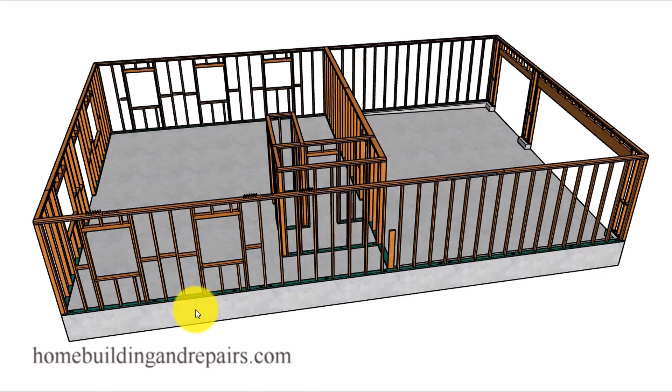Here is another video that will make a big difference, especially if you're going to be doing any of your own plumbing or electrical when it comes to dealing with top plate connections and framing, and plumbing pipes and electrical wires that are going to be running through these areas.

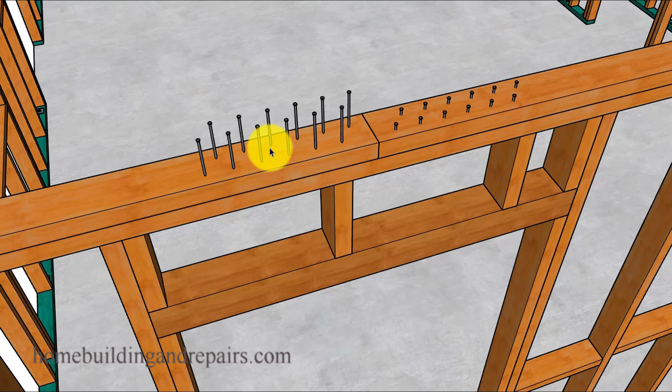Now, the first thing I want to point out is that most framing breaks, the building plans usually require 12 nails on each side of the framing break. And that's a lot of nails.

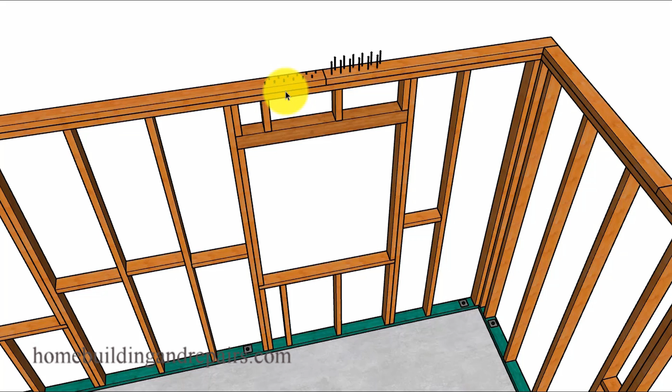If we step back here, you can kind of see that when it's over a window header or another place where there might not be a lot of electrical or plumbing running through those areas, these could be the perfect spots. Since you're going to need these nails at every single break, it's not a bad idea to try and design the house so that these breaks are strategically located.

And of course, it's not a bad idea to use the longest framing plates possible so you don't end up with a situation like this all the time. Now, I'm not saying this is a bad situation, especially if the electrical or plumbing is going to be running in this area and you're not going to have anything in these other areas.

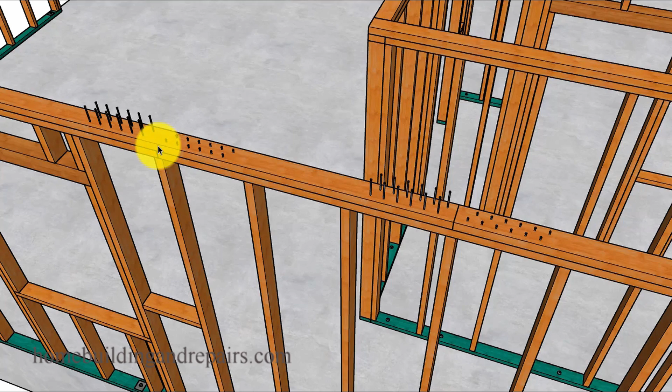So again, you can see where planning out the framing breaks and using the correct lengths of lumber could make a big difference in your project, especially if you need to use straps that are 48 inches long and require like 50 or 60 nails in them.

I don't know exactly how many nails they require, but now instead of having all of these nails running through the top plates vertically, you're going to have them running through horizontally. Either way, something like this, or the 12 nails on each side of the framing break, can create a problem for the plumber or electrician who needs to drill a hole through them.

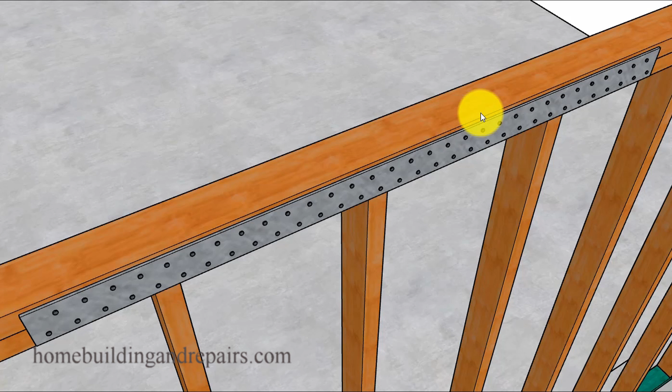Now let's take a look at the break and let me explain why you might need a strap there. So if you remember, we had a break here, and if you have a break in between the framing plates that is shorter than 48 inches, then you might need to put a long strap on it.

Now that will be determined by your engineer or your local building authorities. So if you're just building something on your own, yeah, you can put your breaks wherever you want to—that might not be a big deal. But if you're building a new house or remodeling, or putting a room addition on, this is something you're really going to have to think about if you have any plumbing or electrical coming through the framing plates in these areas.

Now, something else I need to point out: since the strap is here, some of you might be wondering, would you need a strap over here too? No, because once we put the strap on here, we've made a solid connection, so the break is no longer there in a way.

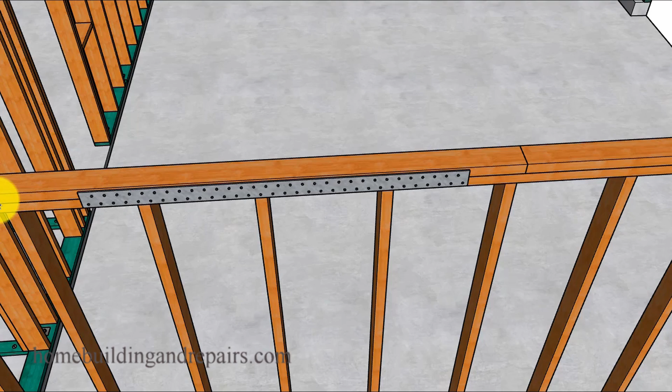And then this break right here is going to be more than 4 foot away, because it's going all the way back to the other break in either direction.

Now, if you do run into a situation where you need to put a pipe through an area like this, it's really not going to be that big of a deal. You just leave the nails out—do not put them in. If you put them in, the plumber's just going to pull them out anyway, so why put them in the first place?

And again, if you don't know where the pipes are going, then fill the nail holes, and the plumber can pull them out. Hopefully they can pull them out and the nail heads don't pop off.

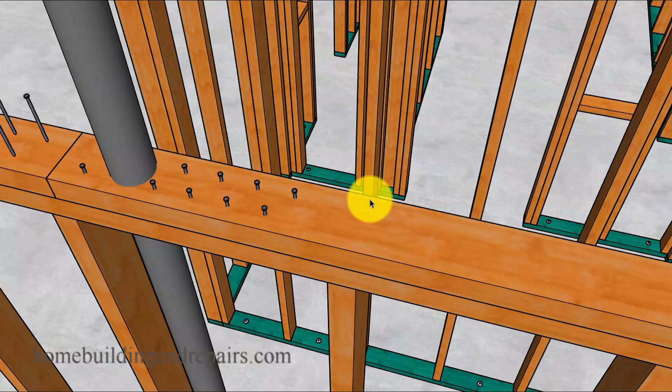For those of you wondering what's the big deal: the plumber or electrician usually comes in and drills a hole into the wall framing plates, hits a nail with their drill, and that ends up either jerking their arm around or dulling the drill bit. Within a short period of time, they're going to have to either get another drill bit or sharpen the one they have.

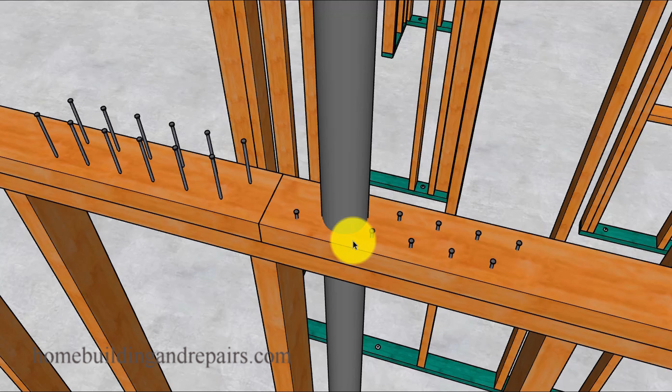If you can avoid having any obstacles in their way, they are going to become your new best friend, especially if you're going to be working with these people over and over again on different projects.

Let me remove the pipe so you can see there are a couple nails in the way. Not a biggie. If you look down while framing the walls, you can see there's a pipe coming out of the concrete. There's a good chance this pipe is going to be running through the plates. Simply leave some of the nails out, or you can relocate the nails a little farther back.

Now, when I was doing this, I remember it said there had to be 12 nails on each side of the framing plate. I could space them farther back. There wasn't an exact amount specified. It didn't say it had to be 2 inches from the break and then spaced evenly 1.5 inches away. I never ran into something like that. If you have, feel free to let us know, but this isn't a big problem.

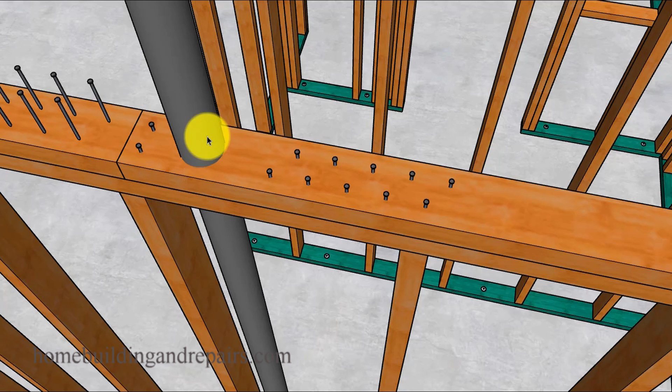If you have a situation like this where there's a pipe coming through, you simply move your nails around to make it work. And of course, if there was a strap, again you would just leave the nails out.

Let's go ahead and take a look at what I'm talking about as far as the framing plates. Here we have a continuous plate, a couple of breaks here, and because this is a continuous plate, I can cut a 2-foot piece here and a smaller piece here, because this is going to be my continuous tie for this situation.

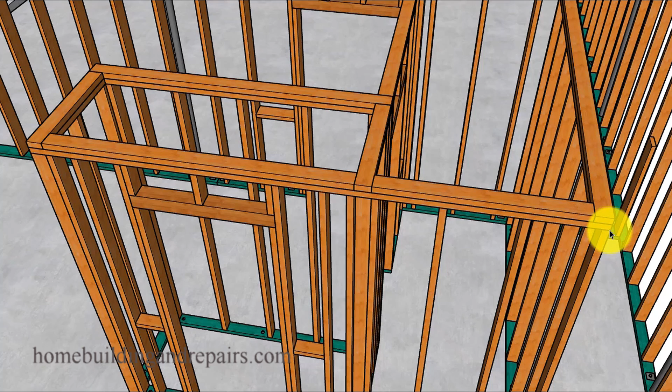Of course, you wouldn't want that, but I can't tell you how many times I came to jobs, a long time ago, where you'd have 2 feet from the edge, a break here, and then another break here, and they might have a piece going all the way across. The framer might even use scraps to fill in the top plates. Today, that's just not going to cut it, so you're going to have to give it a little more thought.

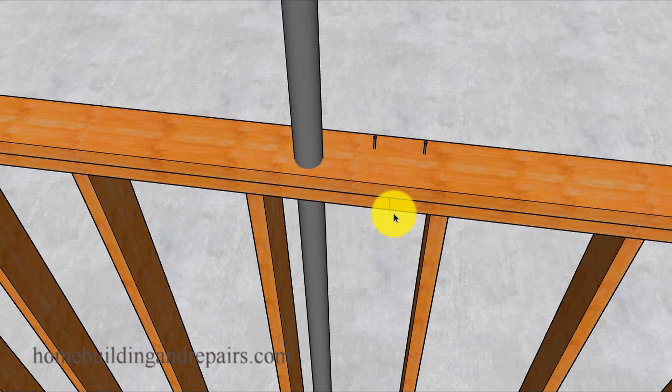Here's another situation where you have a pipe coming up. Here's the break, not going to be a big deal. You just put a couple of nails on each side.

Then, after you've got the whole house framed and all the plumbing and electrical is in—and I've done this plenty of times too—it doesn't specify that the nails have to go down from the top. They can actually go up from the bottom. Something like this just might work out great for you. Just put your 12 nails on each side of the break. The electrician and the plumber won't have very many nails to run into, and that could be a win-win deal.

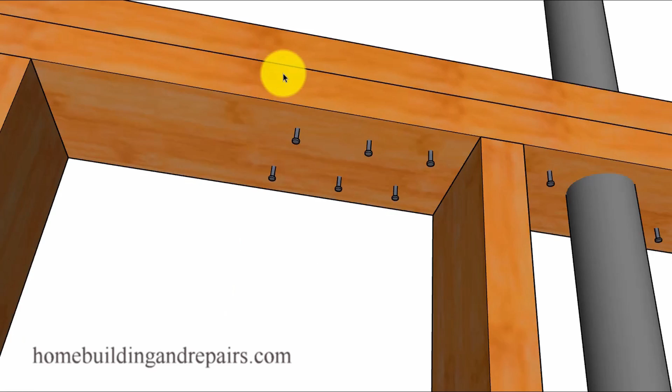Now here's another tip, and this one's easy to do: simply put the nail just a little bit over on each side of every wall framing stud. If you stagger your nails, you can see how I have one on this side of the framing plate and one over here on the other side, but they're right off to the side. The reason for that is to avoid hitting the nails you already drove into the framing studs below.

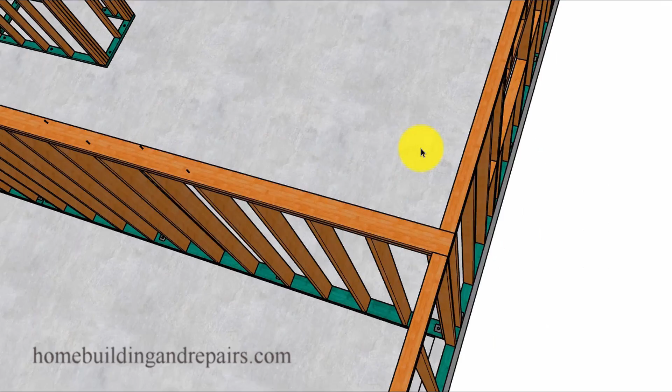So hopefully this makes sense. Here are the nails staggered—the plumber has an open spot, the electrician here too. If you put the nails in the middle, the plumber and electrician are not going to be your best friend, but something like this, yes they will. Especially if you're doing the work yourself. I can't tell you how many times I would frame something, then go through and put the plumbing and electrical in, and hit the nails I drove in myself before I locked this little nugget of wisdom away in my brain.